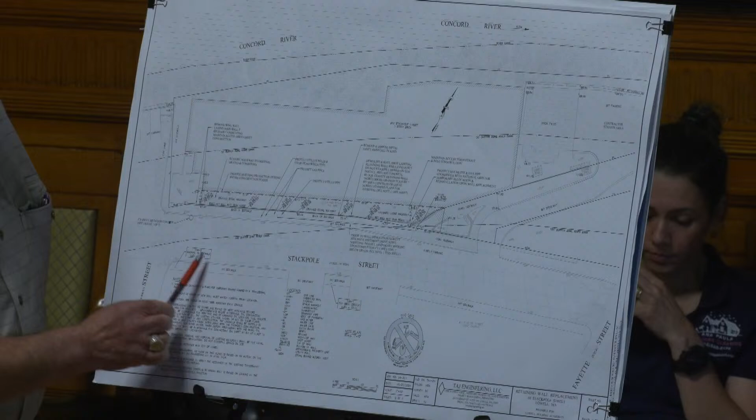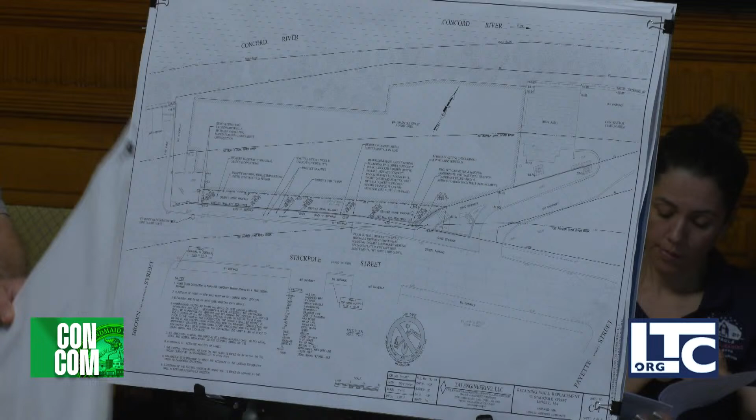Right next to this three-story brick building, we run very parallel to Stackpole Street. There is a retaining wall here, which starts from here all the way to this point. The total length... okay, so that's a plan view of the whole entire site.

The Stackpole Street, the retaining wall, the subject retaining wall, the building in between the street, the wall, and Concord River. This will probably give you a better idea, it's a little bigger. This is a profile, a longitudinal profile of the wall.

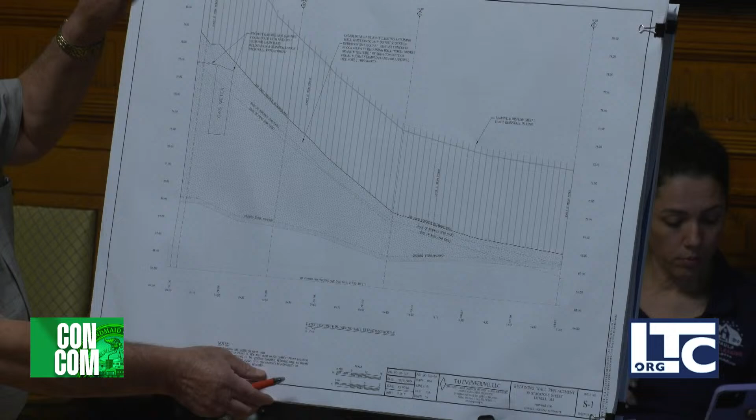This is the 5-foot fence up on top of the wall, and this is the existing back of the sidewalk of Stackpole Street, and somewhere here is down where the grade, the wall meets...

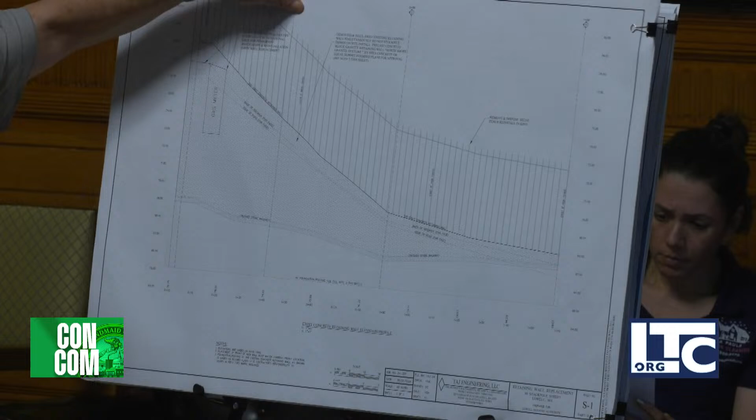...this corridor, about 7 foot wide, between the wall and the building. The height of the wall varies from touchdown, probably a foot and a half to 2, all the way at the high point, which is here, somewhere here, the high point, about 9 foot above the grade, above this elevation of this corridor here.

And of course, in the back of the sidewalk, at the far face, it is just a short parapet wall, which top of the wall is higher than the back of the sidewalk, and the safety 5-foot fence at top.

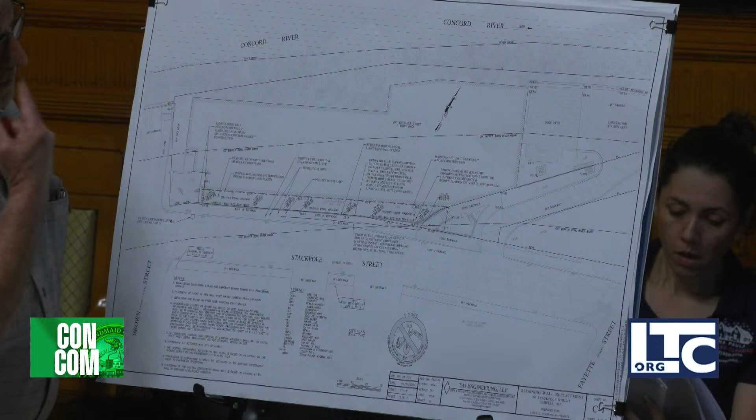What we are proposing to do—technically speaking, the wall has tipped, it's close to the building. There are a couple of considerable cracks, and then a rotation, a segmental rotation of the wall towards the building. The most efficient, cost-effective, feasible way would be really to replace the wall.

The existing wall is a cast-in-place concrete wall, and in order to minimize the work and basically all the proposed activities in the area, we are proposing a precast concrete block wall, a gravity wall, which you probably all have seen along the highways, major roadways, and so on and so forth.

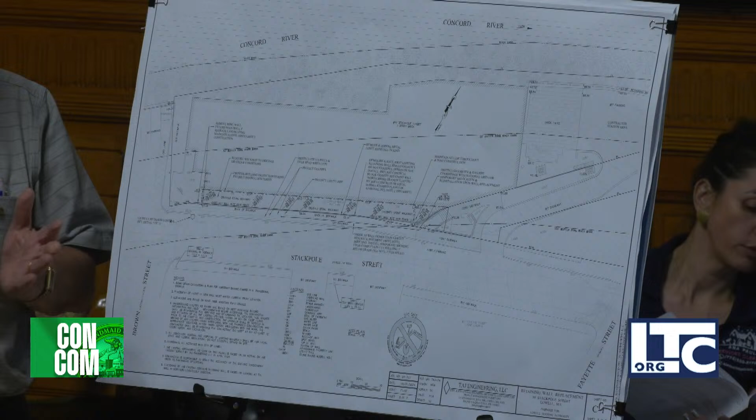It's a gravity wall. It stands, it resists all the lateral pressure, surcharge from the traffic and from the earth, due to its gravity, due to its weight. There is no form to be made, and it's much easier—you bring it precast, take it off the truck, and you just place it on.

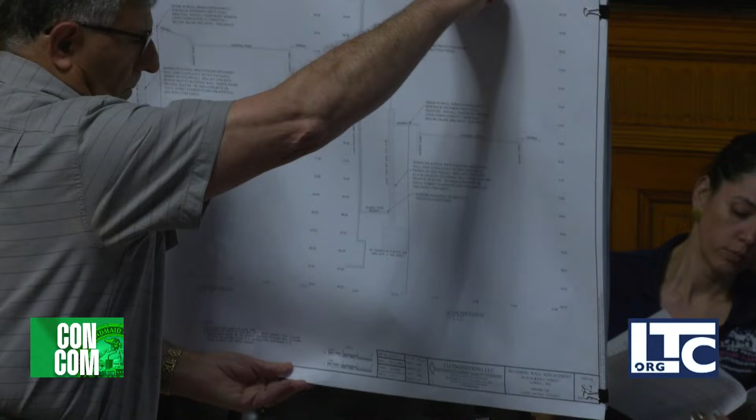Of course, first we have to remove the existing wall, for which we are proposing—which you may say is the most involved or active, for lack of a better word, of the proposed project. So we are proposing to drive sheeting. It could be where the elevation of height is higher, maybe about 4 feet or so. It could be steel sheeting, which is made for this purpose, and at some areas, depending on the type of soil, we could even use wood sheeting.

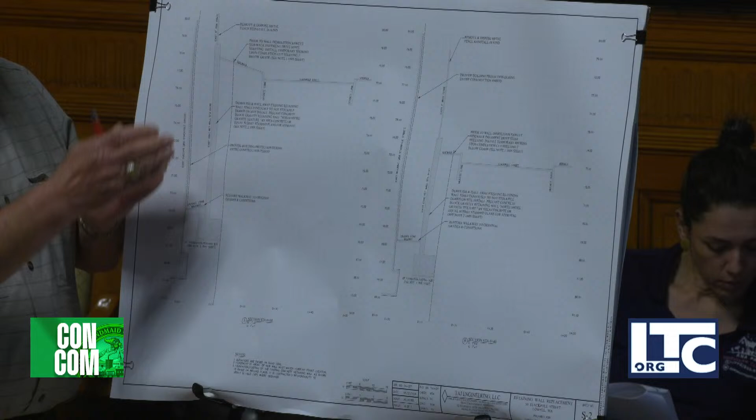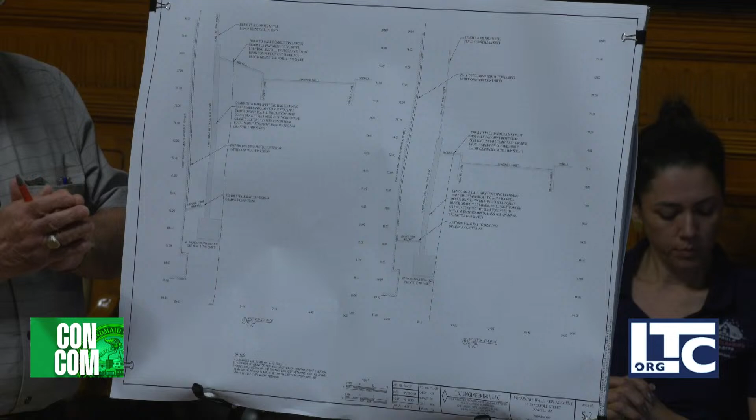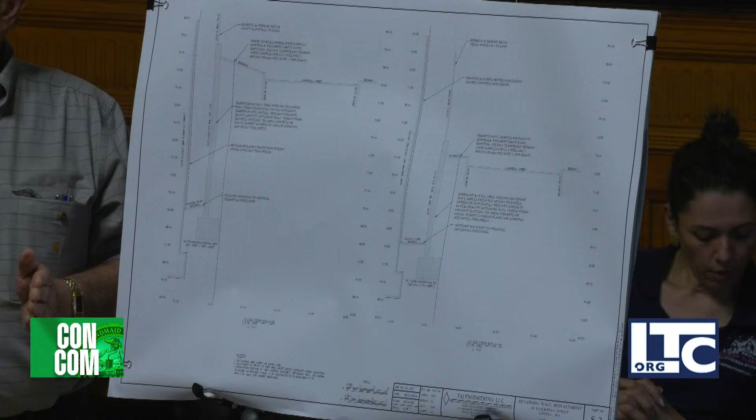The sheeting gets driven into the ground behind the wall, and it goes down enough, and that way it provides temporary shoring, and the existing retaining wall could be removed in segments. Now it's ready to come back, place the blocks, and do whatever backfill we need in the back, which shouldn't be too much, mostly crushed stone for drainage purposes. Then install the fence, and the sidewalk and street are available for the city to do their repaving and repair of Stackpole Street.

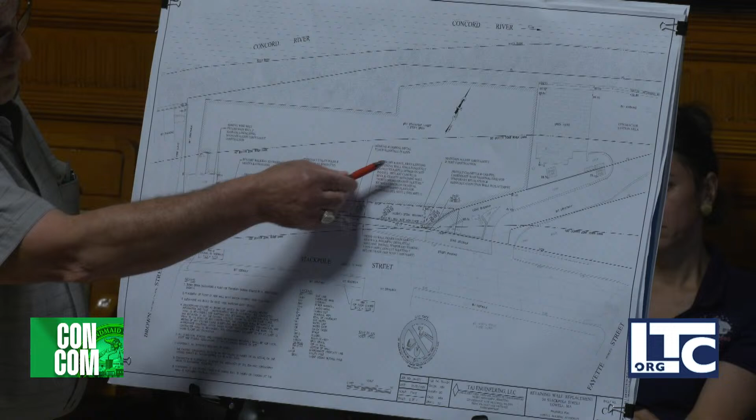In terms of environmental issues, the whole building, majority of it, sits within this 50-foot buffer. If this is the riverbank, which is way below—I'll come to that in a minute—the majority of the existing building is probably 70 to 75 percent of the footprint within the 50-foot and 100-foot buffer.

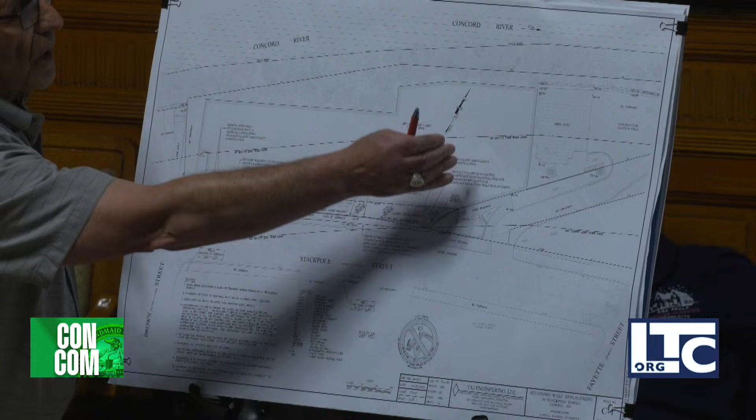And the proposed activity, the wall, is much closer to the 100-foot buffer, which at the farthest point is about 20 feet at most from the 100-foot buffer line, within the zone between 50 and 100. The tall five-story building—these are tall historical buildings here in Lowell—creates a dam or good protection for the river, so there's really nothing that can pass through the building itself. The wall ends here, well before the end of the building, so there's no chance any debris could travel toward the resource area.

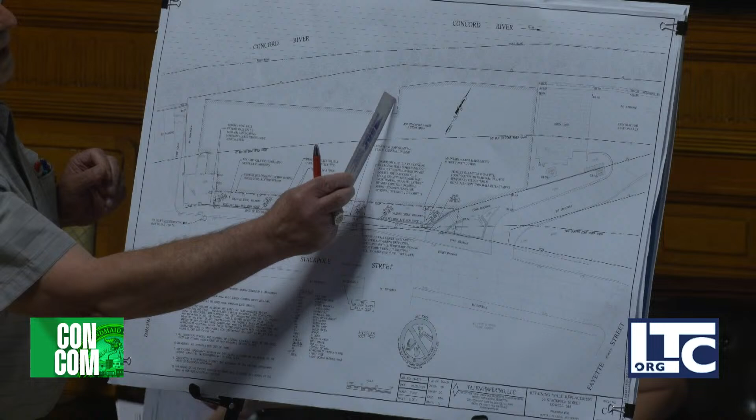Here, the retaining wall also ends before the end of the building, so the protection continues. Also all along here, by the river, in this area, the building continues down toward the elevation where the river is, toward the view of the river.

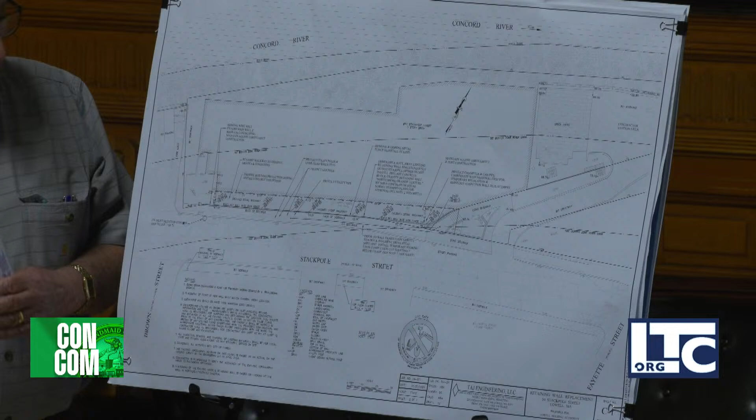But beyond the building, at this location and this location, there's a parapet wall of minimum two feet high. So assuming any sediment by any chance travels down, the parapet wall holds it far better than a silt fence or erosion control barrier. There is one catch basin here at the very low end of the wall, which we are proposing standard protection for.

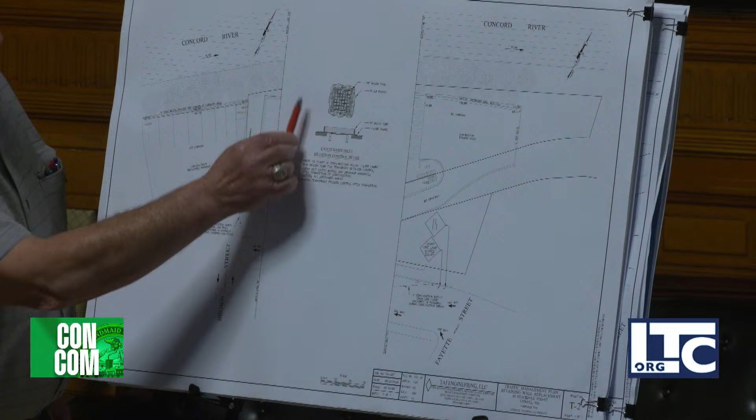We provide filter fabric under the ring, and around it there will also be the standard erosion control mulch tube protecting that single catch basin. Other than that, there is no other catch basin or any inlets in that part of the street where we are proposing work.

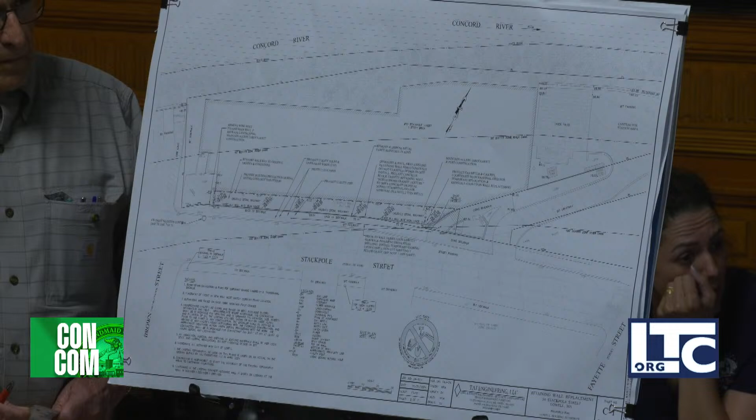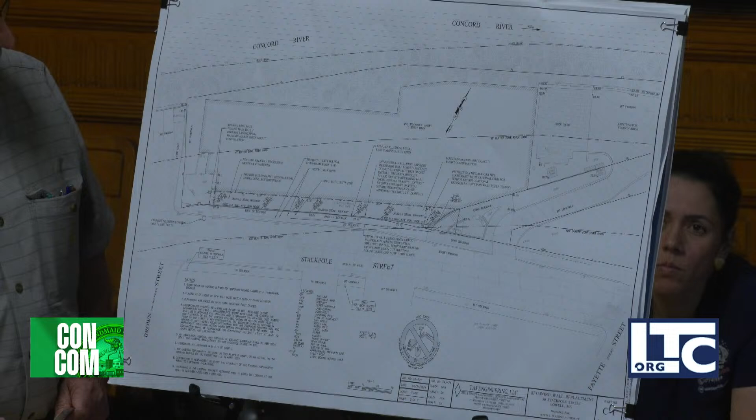So we believe we are not causing any adverse impact to the resource area, and there is no stockpile at the site—it's demolish and remove, haul away at the same time, from ground to truck to drive away. If there is any equipment to be parked, it will be either here or the parking area on the other side of the building, which belongs to the Lowell Housing Authority, again by the parapet wall, which is a good barrier between this area and the river.

So with that, we would like to request the approval of RDA, and any questions, I'd be more than happy to answer.

So I'd agree, based on the way that you explained it, that there's no way for any disturbed soil to get from Stackpole Street or the front of the building into the river. The only concern I would have is if you breach the crest of the hill at the high side, down toward that driveway that wraps down the right side of the plan. If you breach that crest, you'd have a way for disturbed soil to get down that driveway, and some additional protections would be needed, but I don't see that happening—I think you've got plenty of space.

We do. Sorry, jump in here if you don't mind. Good evening, Laura Watts, Capital Asset Manager with Lowell Housing Authority.

Yes, we are not going to disturb the front entrance of the building, which is at the top of the hill on Stackpole Street. There's some older stonework there that we really want to preserve, and there's no need for us to go beyond the high point of the wall, so I don't foresee any situation in which we break that crest of the hill.

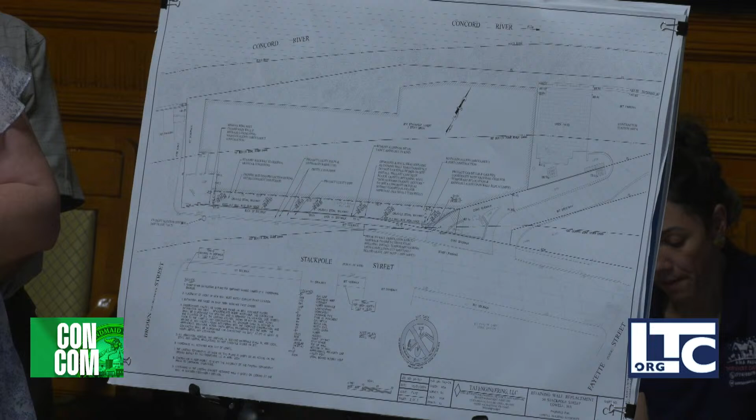We could certainly have a few silt bags around, but having them along the entire riverbank would just be extra cost that wouldn't provide any protection for a project we know will not impact the river. And that catch basin at the bottom of the drive on Stackpole Street is tied into the drainage system? Yes, so we would for sure have a catch in that to make sure.

So we're certainly open to having some silt barriers at this end and maybe just a bit here, but to run the entire course of the riverbank would just be an expense we would like to avoid.

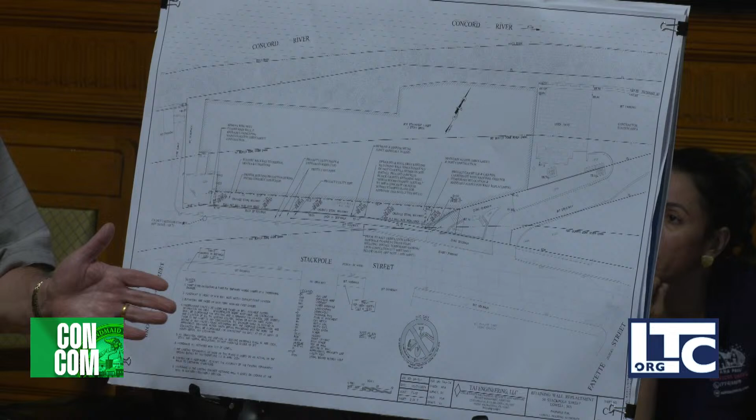So my question was, is that catch basin tied into the drainage system? Does it go into a drain, or does it drain directly to the river? I believe it's part of it, yeah, I think it goes to the river. Okay, there's another pipe under the building, under the road, but we have no access to it. So that's why we're protecting it with the barrier around it and the filter fabric under the frame.

So if it's draining directly to the river, I would like to request that after any significant rain it is cleaned out. Put it as a condition. Thank you. And the wattles as you described are fine with me. Anybody else?

I'll make a motion to grant this project a negative-3 determination with the stipulation that if there is a high rain event, the drainage basin is cleaned out. Second the motion. Aye. Aye. Thank you very much. Good luck.

Brad, I have a question here for my new friends. They have to pick up a certificate of compliance that was already approved, and all documents were emailed to the seller's attorney. So the next item on the agenda is their request for a certificate of compliance.

Okay, excellent. This is Carlos Alberto Cordero. Yes, hi, okay, hola. There may be a bit of a language barrier. Sure, is anyone able to? I only know hi and thank you and coxinha. What language, Spanish? Portuguese. Portuguese, yeah.